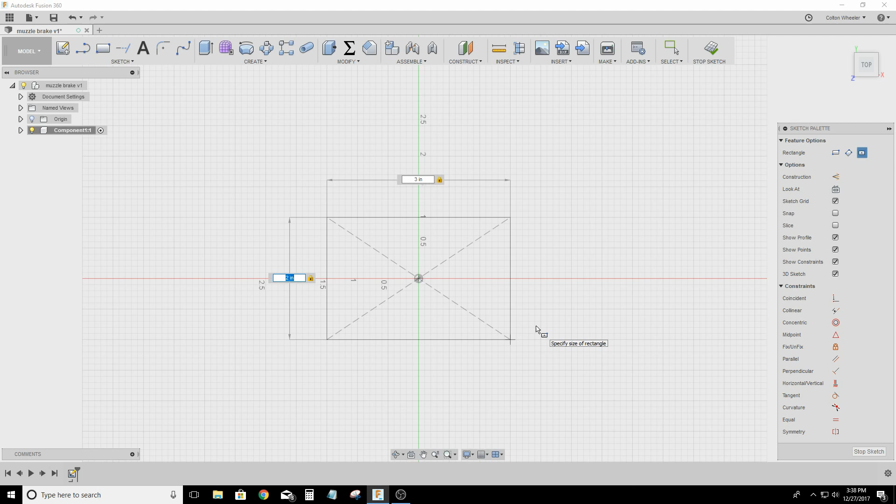R for rectangle, center point. We're going to do it 2 inches by 3 inches. Okay, and to switch between the two dimensions, I just hit tab, enter. I'm going to hit E for extrude, and we're going to do 0.5, and we're going to change this from one-sided to symmetric. Okay, let's go ahead and go back and edit our sketch.

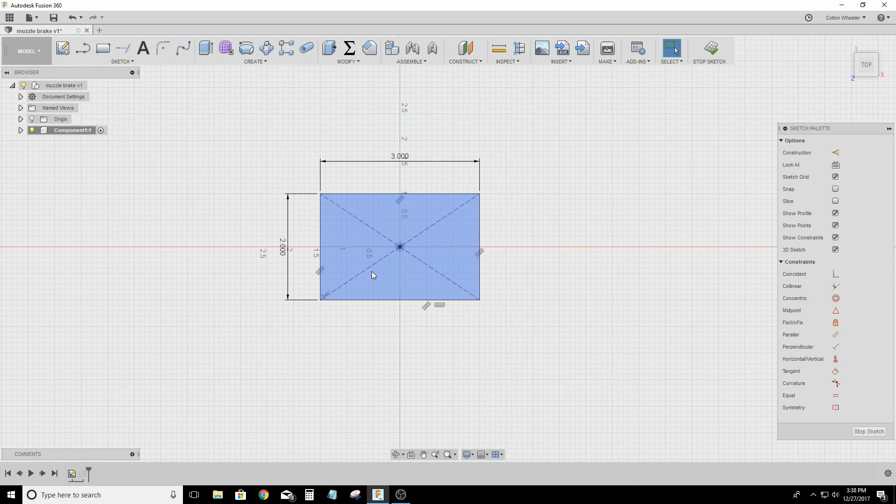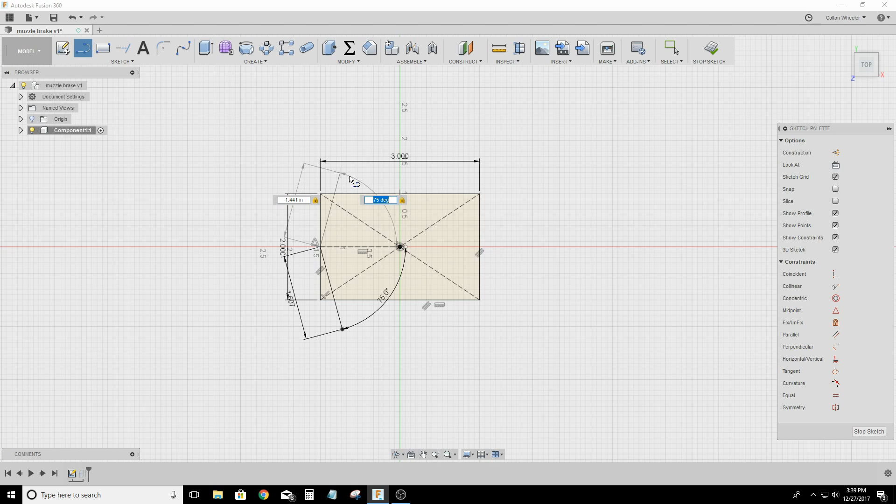L for line, we're going to hover over the center point, snap to the center point of this line. Tab, we're going to go to 75 degrees. L for line again, snap to the center point, tab, 75 degrees. Okay, we're going to go ahead and hit T for trim. We're going to trim off the front of this and the ends of these lines. We're going to go ahead and get rid of these.

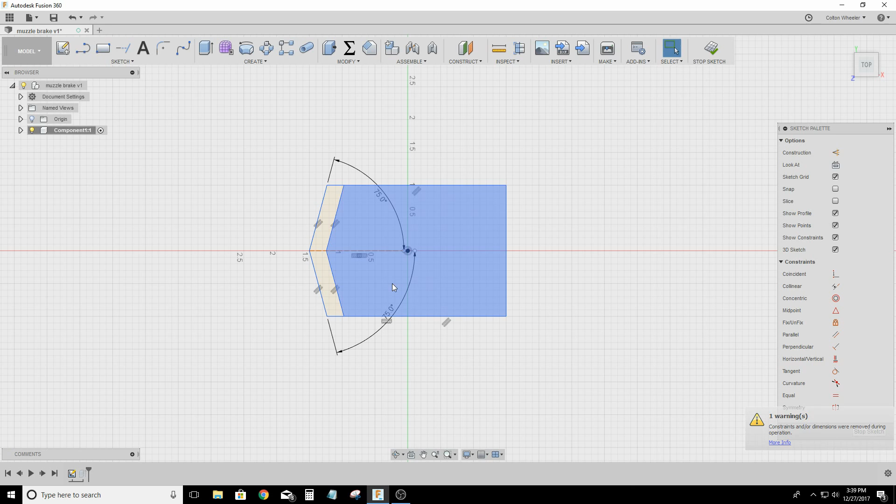Okay, so we're going to hit O for offset. We're going to select these two lines. Make sure your chain selection is unselected. We're going to go minus 0.25. And then we're going to go ahead and extend that line and that line. Hit O for offset again. 0.25. We're going to do this one 0.5. Okay. Now we're going to extend those lines again.

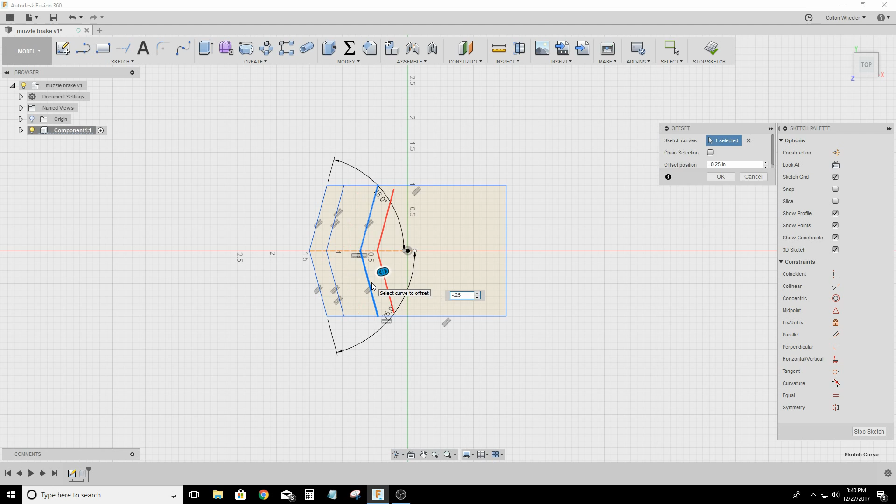And the reason I'm extending them before I do the next offset is because it breaks the link on that line, so it's not linked to this line anymore. It won't let you do another offset if it's linked to something else. So we're going to hit O for offset again. Okay, just keep repeating. Okay, so now we got our 2 ports in there. This is going to be 1, and this is going to be 1.

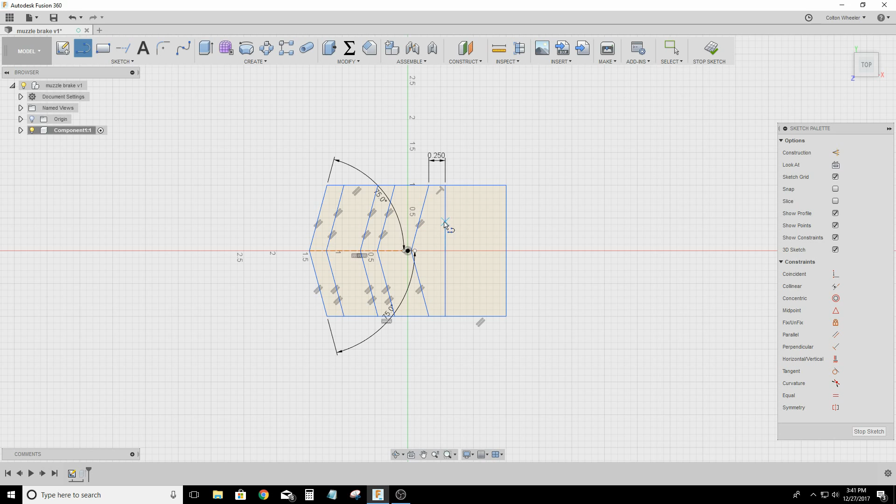We're going to go ahead and create the back on this. Hit L for line. Snap there to there. Hit D for dimension. 0.25. Okay, did the wrong one. Let's see, D for dimension. Okay, so I had to select that point first, then that point. Then we're going to go ahead and extend this line down to there. We're going to hit L for line again, create 2 lines. From that line, we're going to dimension that out 1 inch.

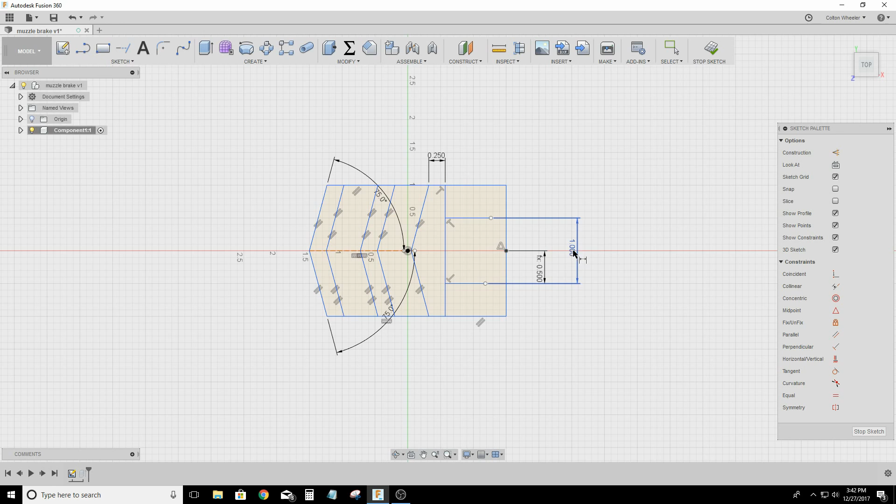Okay, then we're going to select this line. Hover over this line, hold shift, that'll give us our center point. And then we're going to select this 1 inch dimension, just going to give us that D15. And we're going to divide that by 2. So now it's linked to this dimension. Whenever we change this, this will automatically update.

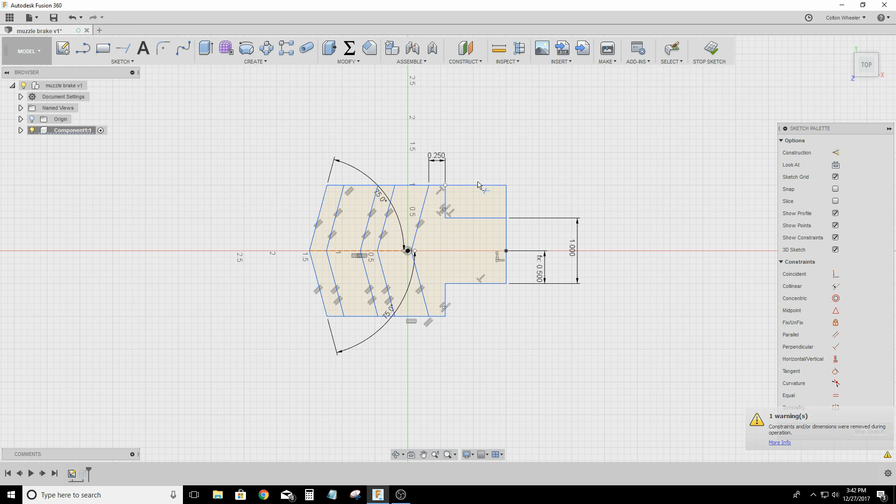Okay, extend those out. The reason I'm not going all the way across is sometimes it adds some kind of a constraint and then it messes up the model. Okay, so let's go ahead and trim off these. Alright, so there's the basic shape of our muzzle brake. Go ahead and stop the sketch, look at it, looks pretty good.

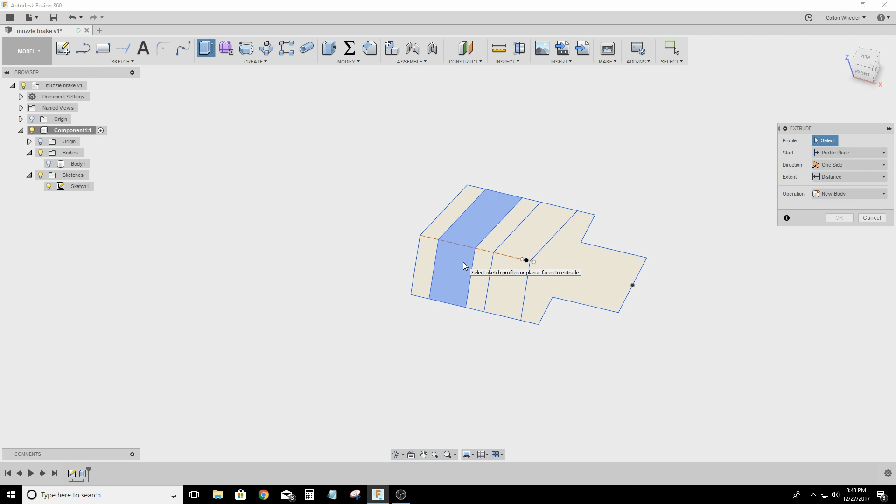Let's go ahead and expand our component, expand our sketches. We're going to turn our sketch on by clicking the light bulb. We're going to expand our bodies, turn our bodies off. We're going to hit E for extrude. We're going to select this port and this port. And then we're going to do symmetrical again. Then we're going to turn our bodies back on. View it from the side. And we're going to do 0.35. Okay. Now we can turn our light off on our sketch again. We can close these back up.

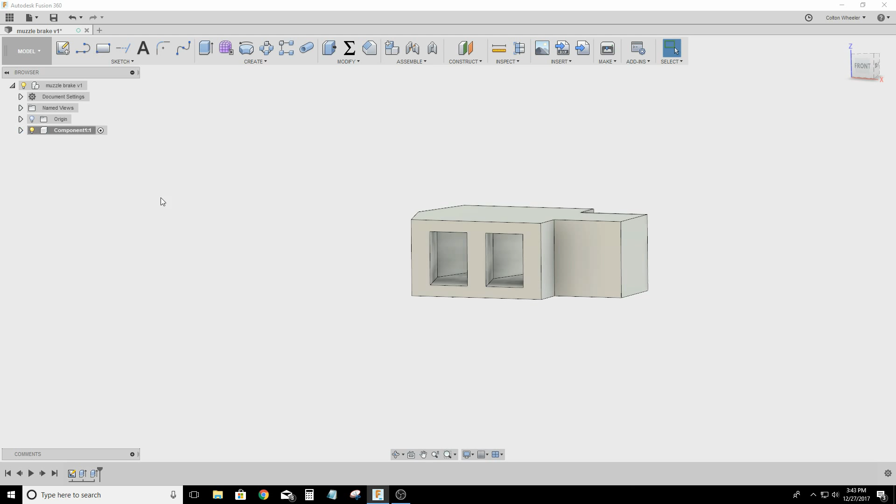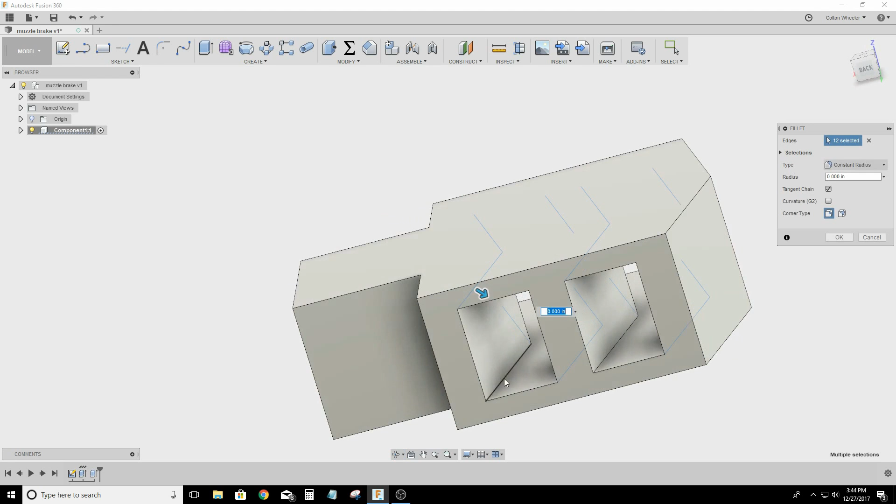Okay, so we're going to hit F for fillet, going to select all these inside lines. And you got to put a fillet in here that's bigger than the radius of your tool that you're going to cut it with. In this case, I'm using a 1/2 inch end mill, so I got to use a 1/4 inch radius on here. 0.25. Okay, make sure I didn't select anything that I didn't mean to select. Looks good. Hitting OK.

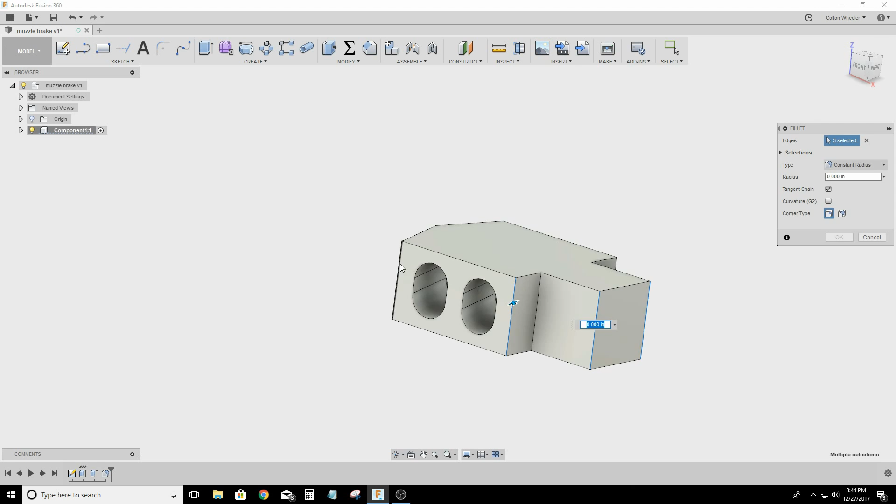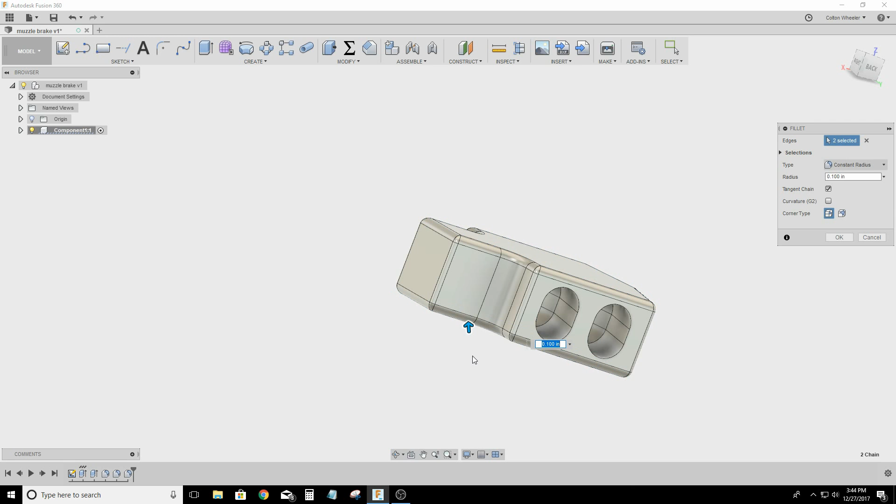We're going to hit F for fillet again. We're just going to put fillets on all these edges just to break them. Okay, 0.05. F for fillet again. I'll put a 1/4 inch on there for our tool. F for fillet. Let's do one on the top too. Let's do 100 thousandths. Looks good.

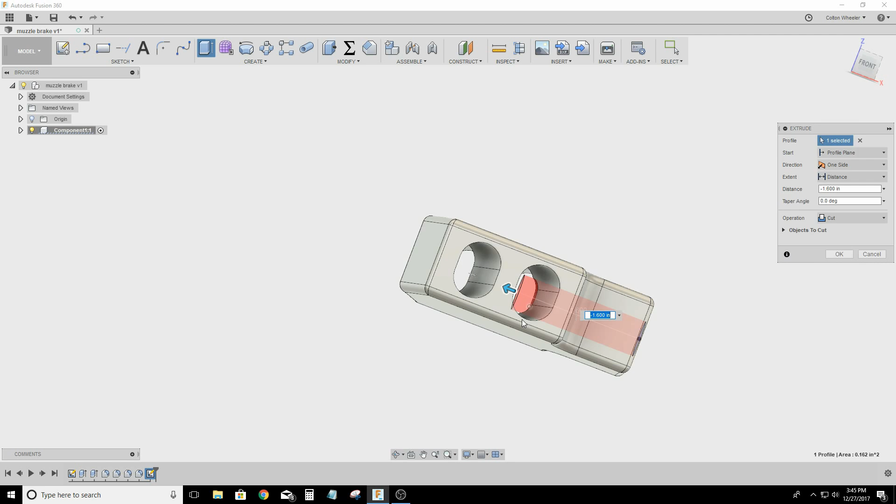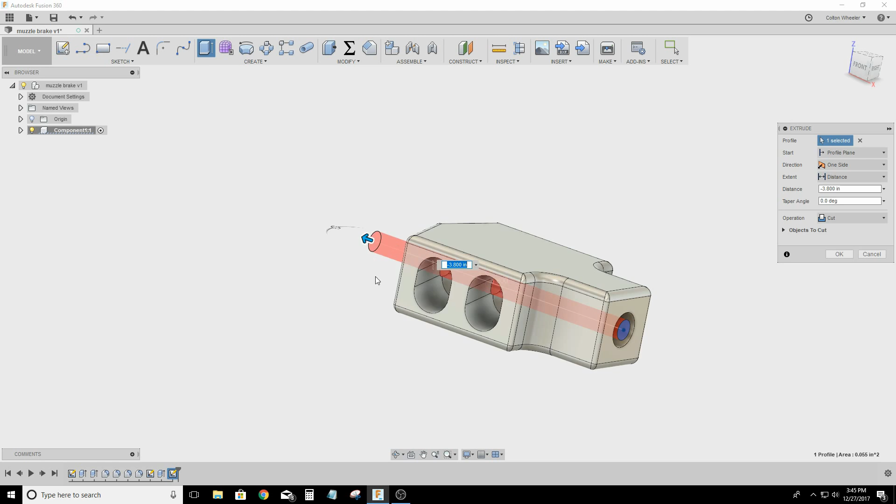Okay, we're going to hit C for circle. We're going to select this back face. We're going to go 0.454. Okay, now we're going to extrude that circle until it breaks out into the first hole, or in the first chamber. Hit OK. And we hit C for circle again, select that same back face, and go 0.265. Then we're going to hit E for extrude. We're going to select our geometry and we're going to drag it all the way through. Hit OK.

Now if you're not sure on the diameter of the hole for a thread, you can always just create the hole any size. So for this example, I'll change this to 0.525. Now we're going to hit create thread. We're going to select that, and we're going to select the size of thread that we want. In this case, we want 1/2 by 28.

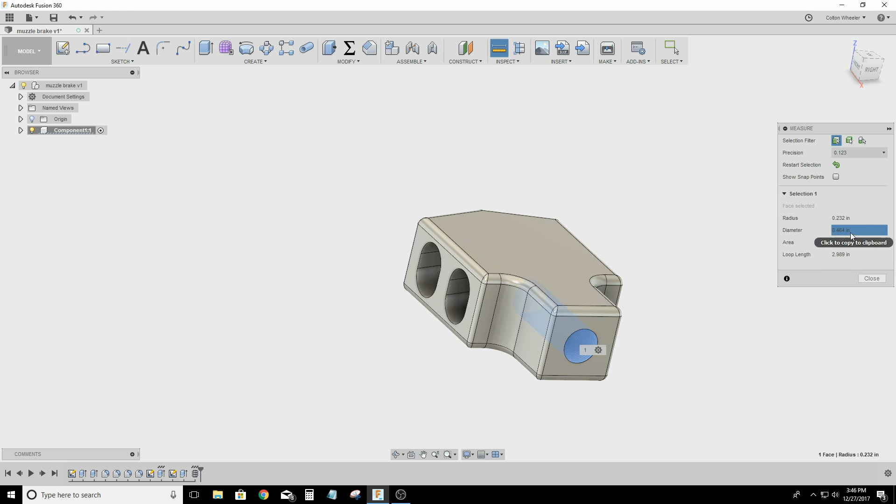Hit OK, and you see it changed the diameter back to 0.464, even though it is a 0.525 hole. So you can always do it that way. Check what it is, and then you can change your sketch back. 0.454, or you could just leave it there because it'll stay that diameter for machining.

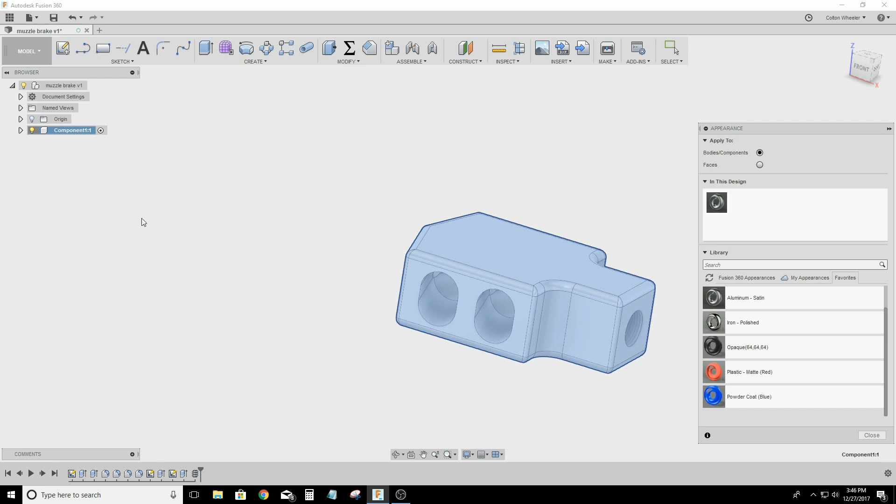Okay, looks pretty good. Let's go ahead and add some color. So we're going to right click on our component, appearance, or the hotkey A. One of my favorites. We're going to do some black. Okay. Alright, so that looks pretty good.